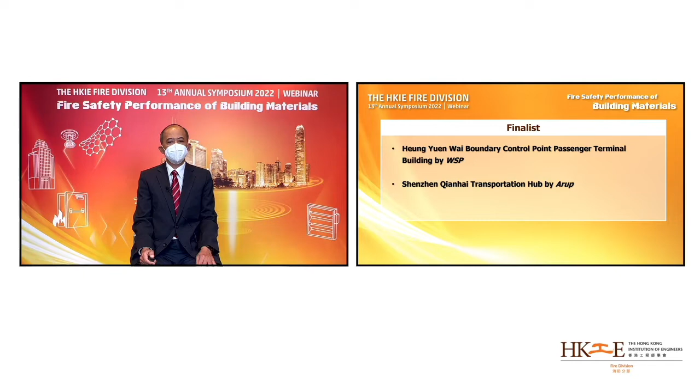This year, the submissions were all of excellent quality and represent a very high standard of works. After the judging panel's critical assessments, they decided 1 grand award, 2 commendation merit awards, and 2 finalists. Here come the results. The finalists are Heung Yuen Wai Boundary Control Point, Passenger Terminal Building by WSP, Shenzhen Qianhai Transportation Hub by Arup. The commendation merit awards are ASI by Arup, Eastern District Advanced Medical Center of Hong Kong Sanitarium and Hospital by Arup.

The grand award goes to the Hong Kong section of the Guangzhou, Shenzhen, Hong Kong Express Rail Link, Hong Kong West Kowloon Station by MTR Corporation and AECOM IDAS joint venture. Great congratulations again to all winners. In order to express their gratitude, our grand award winner has prepared a video to say a few words for us. Thank you.

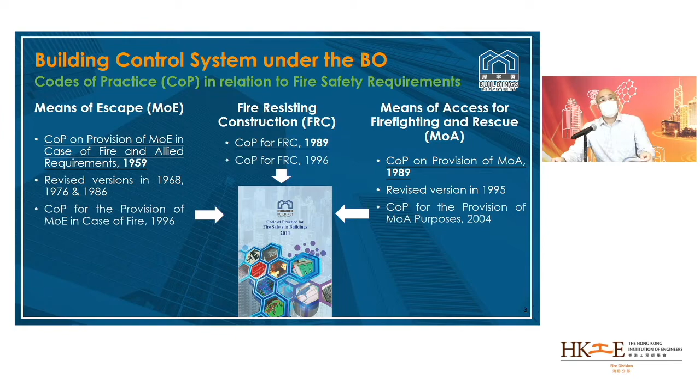Coming back to the statutory requirements. One of the main purposes of the BO is to provide for the planning, design, and construction of buildings. Any person who intends to carry out building works is required to appoint an authorized person, AP, a registered structural engineer, RSE, and where necessary, a registered geotechnical engineer, RGE, for the geotechnical elements, to prepare and submit plans for the approval of the Building Authority, BA. Before commencement of the approved works, consent from the BA is also required. The person is also required to appoint a registered contractor to carry out the building works. No new building shall be occupied unless the BA has issued the occupation permit.

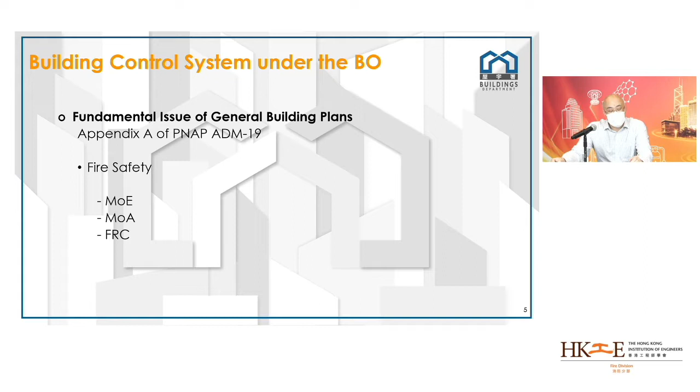Now, for submission of general building plans, superstructure plans, and drainage plans, etc., a curtailed check system has been adopted by BD for checking fundamental issues only. PNAP ADM-19 Appendix A has listed out all such fundamental issues for general building plans, including MOE, MOA, and FRC. MOE. The requirements of MOE are governed by Regulation 41 of the Building Planning Regulations. Paragraph 1 is most important, which says, every building shall be provided with such means of escape in case of emergency as may be required by the intended use of the building.

Now, MOA. As stipulated under Building Planning Regulations 41A, B, C, and D, MOA involves 4 parts: the access staircases for firemen, firemen's lifts, firefighting and rescue stairways, and emergency vehicle access, EVA. The first 3 regulations outline the requirements for MOA to allow firemen safe and unobstructed access to all floors of the building in the event of fire, while EVA concerns vehicular access and operation of fire engines.

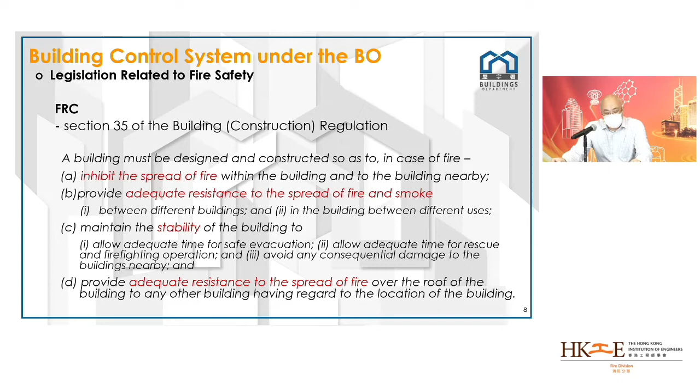FRC. The requirements of FRC are governed by Regulation 35 of the Building Construction Regulations, which stipulates that a building must be designed and constructed so as to, in case of fire, inhibit the spread of fire, provide adequate resistance to the spread of fire and smoke, maintain the stability of the building, and provide adequate resistance to the spread of fire over the roof of the building to any other building.

Now, the FS Code. The FS Code was issued by Building Department in September 2011 to provide guidance on compliance with the requirements of MOE, MOA, and FRC. In addition, it also provides guidelines on the testing standard for the fire properties of building elements and components, fire safety management of buildings, and an alternative approach in fire safety design, that is, fire engineering approach.

The FS Code comprises 7 parts. Part A shows the framework for fire safety in buildings, the objectives of fire safety and compliance. Parts B to D provide the deemed to comply provisions in relation to MOE, FRC, and MOA respectively. Part E provides the deemed to comply provisions for the fire properties of building elements and components.

Part F provides guidelines on managing and maintaining the fire safety provision of buildings to assure that the fire safety provision installed can be operated effectively for the intended life of the building. Part G provides guidelines on fire engineering.

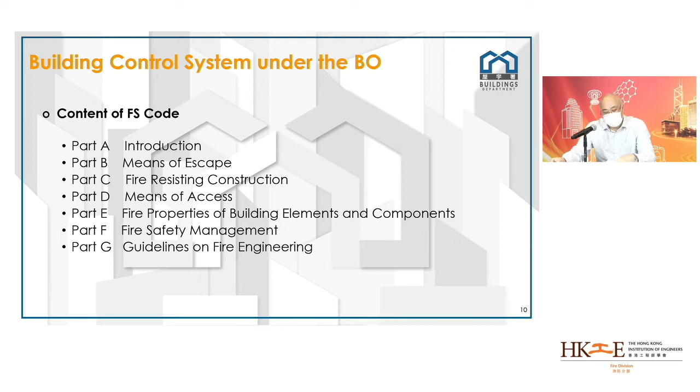Now we come to the principle on use of materials under FS Code. Part E of the FS Code stipulates the relevant parts of the international standard of ISO and the national standards which are considered acceptable to the BA for demonstrating the fire property of building elements and components.

As mentioned before, Section 35 of the Building Construction Regulation stipulates that a building must be designed and constructed to inhibit the spread of fire and provide adequate resistance to the spread of fire and smoke. Section 28 and 30 of the Building Construction Regulation also require that the material used for claddings and curtain walls shall be non-combustible.

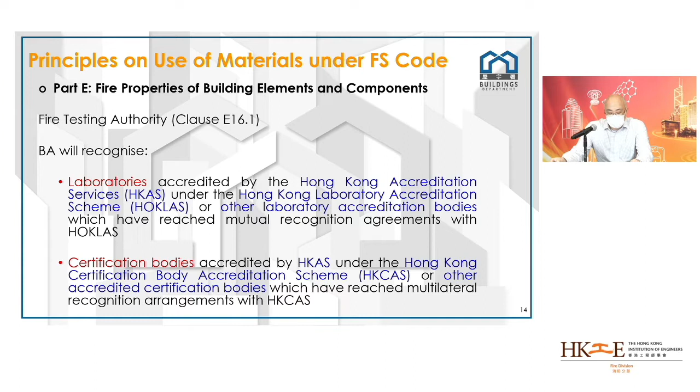As stated in clause E16.1 of the FS Code, the BA recognizes the laboratory accredited by the Hong Kong Accreditation Services, HKAS, under the Hong Kong Laboratory Accreditation Scheme, HOKLAS, or other accredited laboratories with mutual recognition agreements with HOKLAS. The BA also recognizes the certification bodies accredited by the HKAS under the Hong Kong Certification Body Accreditation Scheme, HKCAS, or other accredited certification bodies with multilateral recognition arrangements with HKCAS.

As stated in clause E16.2 of the FS Code, the fire properties of materials, products, or construction components shall be tested in accordance with or assessed against the standards stipulated in this part and certified as being capable of achieving such fire property to the satisfaction of the BA. The BA accepts test reports prepared by a recognized laboratory; the BA also accepts an assessment report prepared by a recognized laboratory or certification body.

Acceptance of test, assessment report, and certificates of conformity. Under the BO, AP, RSE, RGE, and RC have responsibilities to supervise building works, including the selection and application of building material products, and to certify compliance with the relevant provisions of BO upon completion of works. BA relies on AP, RSE, RGE, and those independent laboratories for testing for compliance with the standards and for certification.

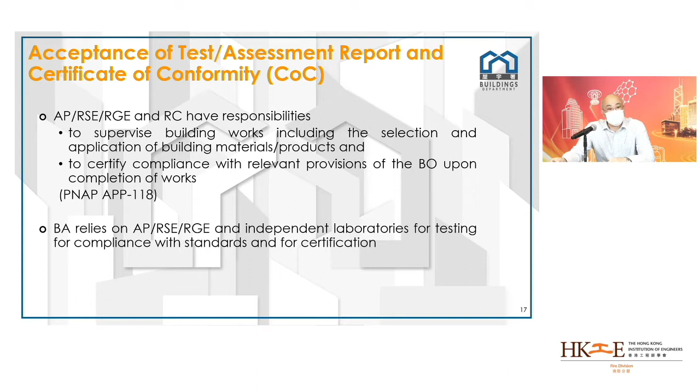PNAP APP 13 and Practice Note for Registered Contractor, PNRC 25, require submission of test and assessment reports and certificate of conformity together with the certificate and schedule of building materials and products by the AP and RC upon the application for OP or completion of works.

Now we come to product certification system. Product certification is a process in which a third-party certification body, after undertaking the specified procedures, issues a certificate of conformity, COC, also known as product certificate, to a supplier confirming that its product satisfies the requirements of a specified Product Conformity Certificate Scheme, PCCS. PCCS stipulates a set of requirements, rules, and procedures for specific product.

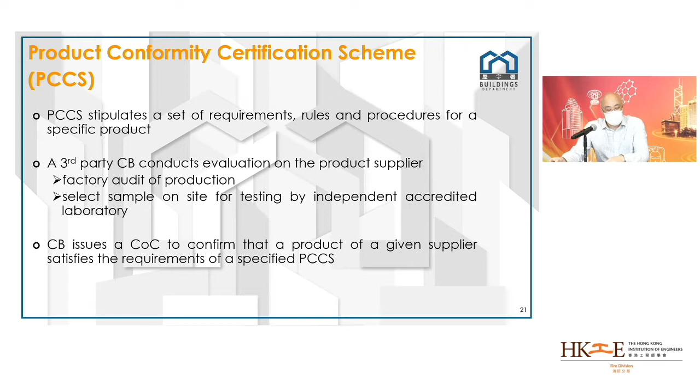A third-party certification body will conduct rigorous evaluation on the product supplier in accordance with the PCCS, for example, by means of factory audit of production or on-site selecting for testing of samples by an independent accredited laboratory, etc. A COC may then be issued to confirm that a product of a given supplier satisfies the requirements set out in the specified PCCS.

Product certification can enhance the product quality through upstream control and ensure the consistency in product quality through continuous surveillance of product process in the factory. Initial evaluation for certification of a manufacturer includes factory assessment of production and selection of sample for testing to ensure the continuous compliance with the conditions of certification. Periodic surveillance audit to the plant and compliance tests of randomly selected samples will be carried out.

Recertification audit will usually be conducted every 3 years before the expiry of the COC. Thus, product certification should bring benefits to the regulatory authorities as to enhancing building safety due to better quality control of building products.

As such, BD issued a new PNAP APP 165 and revised the PNAP APP 13 and PNAP ADM 20 in September 2021, promulgating the acceptance of COC of fire-rated door sets and non-load-bearing fire partition walls under PCCS for passive fire protection products, fire door and non-load-bearing fire partition, issued by accredited certification bodies, as an alternative to the test or assessment reports prepared by accredited laboratories to demonstrate compliance with the BO.

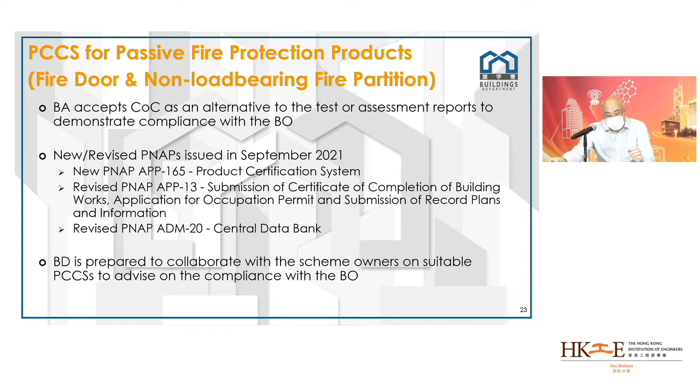Central Data Bank. Central Data Bank mainly contains information of building materials, components, and construction systems that have been accepted by BD. Such acceptance in Central Data Bank will generally be based on tests and assessments carried out by the accredited laboratories or the COC issued by relevant accredited certification body. The Central Data Bank aims to provide a reference to the AP, RSE, RGE and other parties concerned in the building industry. It is intended to help sharing of information among the administrators and to enhance public access to information.

The test assessment reports and COC should be assessed and certified by the AP, RSE, RGE appointed for a completed private development project as meeting the standards stipulated at the time of submission to BD in accordance with the PNAP APP 118 and APP 165, respectively.

If the AP, RSE, RGE are satisfied with the use of such materials and do not wish to submit a hard copy of the test assessment reports or the COC, which are identical to those listed in the BD list of the Central Data Bank, they may simply quote the reference numbers from the Central Data Bank in their certification. Central Data Bank can be found in BD's website.

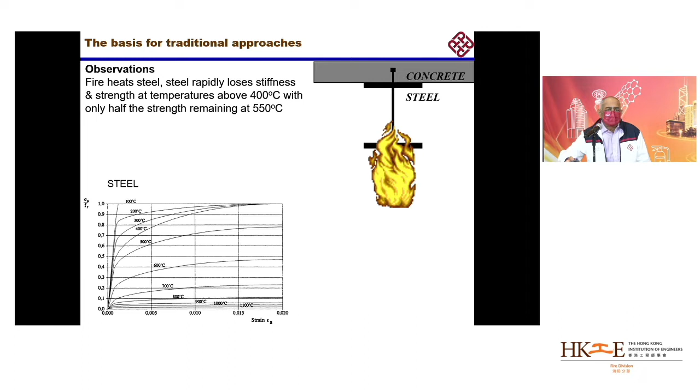But in the case of concrete, because concrete has much lower thermal conductivity compared to steel, concrete actually doesn't lose so much of its sectional strength and stiffness, because most of the heat is limited to the surface layers. So that's typically the general understanding of material behavior in fire.

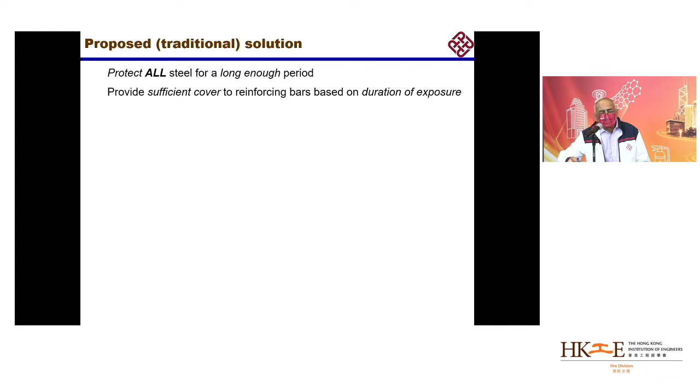Based on that understanding, the traditional proposed solution is to protect all steel for a long enough period because of its properties, but provide sufficient cover to reinforcing bars, because concrete is typically not just concrete, you have steel inside it, reinforcing bars. So we provide cover to reinforcing bars for a sufficient depth so that they are protected from the heat effects.

And then we traditionally apply a standard fire curve, which is a 100-year-old curve that was developed in the USA. There are many versions, like the British Standards version and others. We then decide on the basis of this how long we are going to protect the structural member. So this is the traditional approach, the prescriptive fire protection approach.

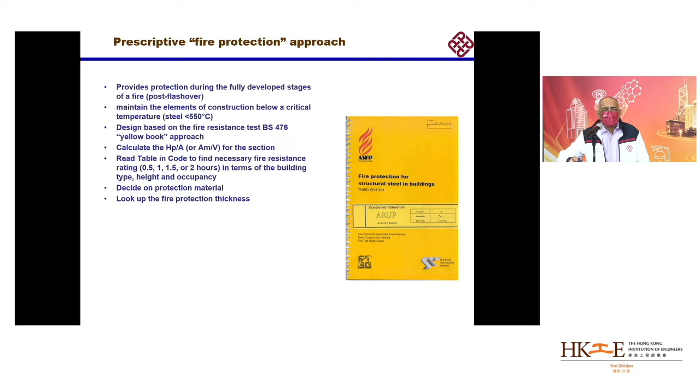So the left beam will typically heat much faster in a fire, and the right beam will heat slower because of larger volume and lower surface area, because the heat has to enter through the surface. So typically you can adjust the protection based on this section factor, the surface area over volume ratio.

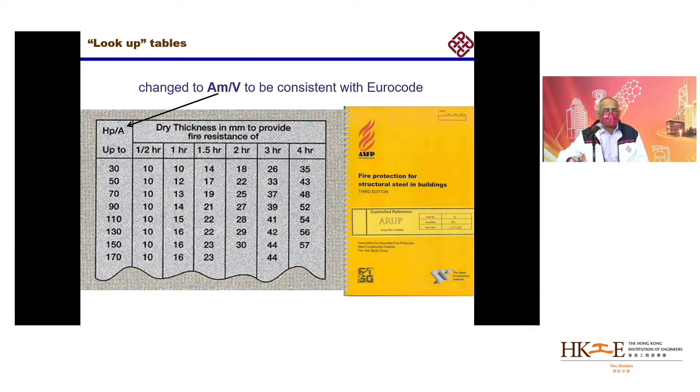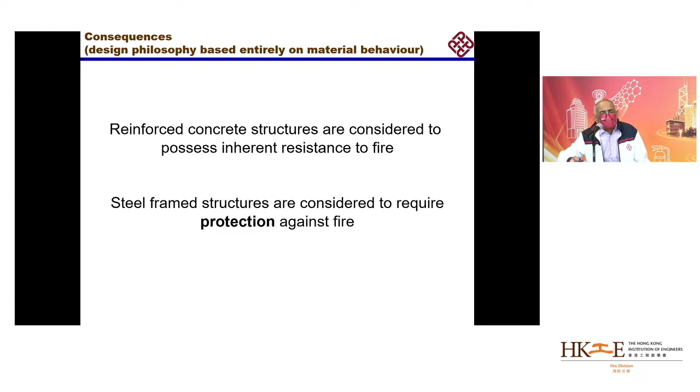So this is basically what generally happens, and it's been happening this way for a long time. The consequence of this way of thinking about fire safety and fire resistance of materials and structures is that reinforced concrete structures are considered to possess inherent resistance to fire, while steel frame structures are considered to require protection against fire. So this is what people think.

And of course the steel industry doesn't like it so much because the fire protection part adds significant cost, and the cost of fire protection can be 10% to 30% of the cost of the structure, based on height, usage, etc.

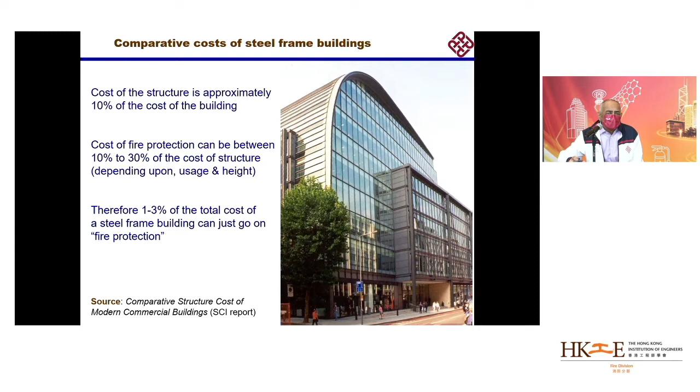Okay, so there have been major events like the Broadgate fire, June 1990 in the UK, where the steel members were not protected because the building was still under construction, and the fire lasted for 4.5 hours with high temperatures. But the building did not suffer too much, despite the steel members not being protected.

The total losses were around £25 million, but the structural repair cost was only 2 million, and the repairs were completed in 30 days. So it shows that reality may be different from our expectations in terms of material behavior.

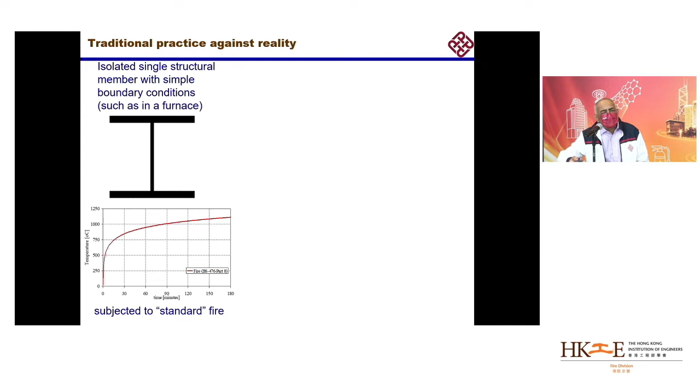So I'll tell you why maybe this is the situation, because what we assume is isolated structural members. When we look at the behavior of steel beams, etc., we look at isolated structural members in a furnace, because we base it entirely on the material behavior. But the reality is that the structure is like a composite beam, and it behaves in an integrated manner, and the structural response depends upon a much more complex situation, and the real fire also is not a standard fire.

This is a typical compartment fire curve, a kind of representation of a compartment fire. You can have ventilation controlled or fuel controlled fires. If you have a fully developed fire, then this is a famous graph which shows that the ventilation controlled fire typically can be a little bit more severe than the fuel controlled one.

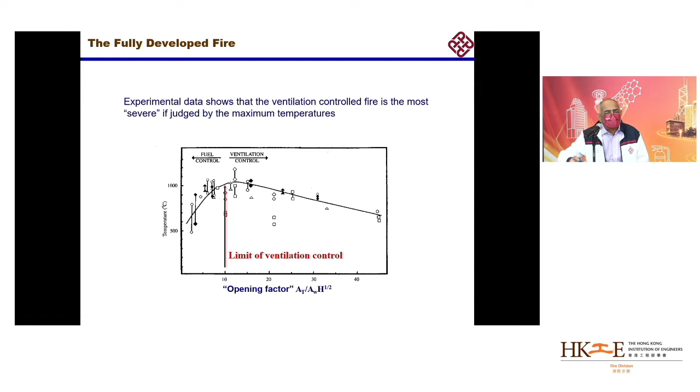So basically what we say is that if you have natural fires, unlike the standard fire, you can have different fires based on the ventilation conditions and the fuel load, and you can have fires which are hot and short-lived, and fires which are relatively cooler and longer lived. Quite different from the standard fire. So in that case, the time aspect of the standard fire doesn't make much sense.

So if we then apply these different fires to basic structural mechanics, this is an example of a restrained beam. This restrained beam is a good representation of a realistic structure, because structural beams are not isolated, they are connected to other parts of the structure. So you can assume that these boundaries are springs.

And then when you heat this beam, and assume that this is a composite beam with steel and concrete, as I've mentioned, the temperature distribution along the height is as shown on the left-hand side graph: the concrete at the top is going to be very cool, concrete exposed to fire is going to be hotter, and the steel is going to be the hottest. So that's the temperature distribution.

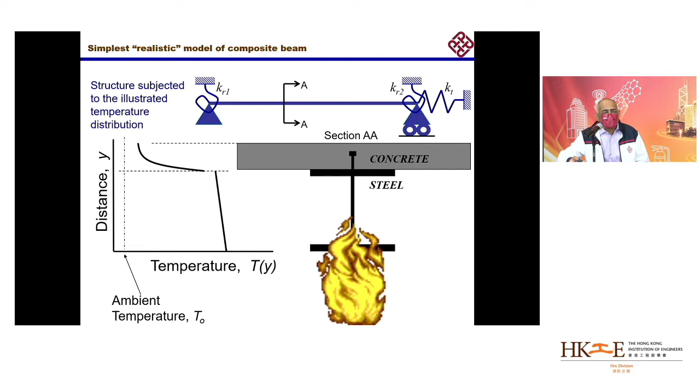This temperature distribution is so complicated, so we say that it is equivalent to some uniform temperature increase delta T and some thermal gradient T,y. We can decompose that, right? We can do some decomposition, and then apply each separately to understand what it does to a beam.

So let's start with a simple beam. This is a simply supported beam; you can see the right support has rollers in it. So if you heat the beam with a temperature delta T, what you'd expect is it will just expand. Whether it's made out of concrete or steel doesn't matter, both expand in fire. So it just moves a little bit towards the right, and we can calculate that. It's very easy to calculate if you know the thermal expansion coefficient of the material.

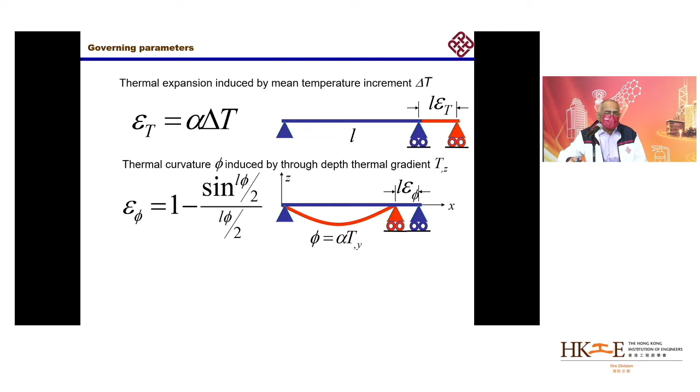Okay, now if you remember, it was not just the uniform temperature increase delta T that we are talking about, we're also talking about the thermal gradient. So if we apply a thermal gradient to the beam, no mean temperature, just a thermal gradient, then the reverse happens. You see the roller moves to the left this time. Because there's no expansion, it just curls because of the thermal gradient now. And we can also calculate that.

But obviously these things don't happen separately, they happen together. So what may happen is that one moves right, one moves left, so you can see that those are cancelling motions. So you may actually have significant deflection, but not much stress in the beam. The fire just curls the beam. But when firefighters or engineers who are not trained look at the high deflections, they think that it's because it's weak and there's too much loading. But it's just the thermal deformations.

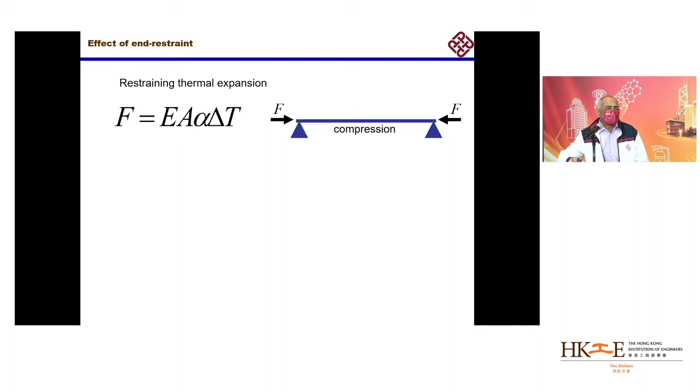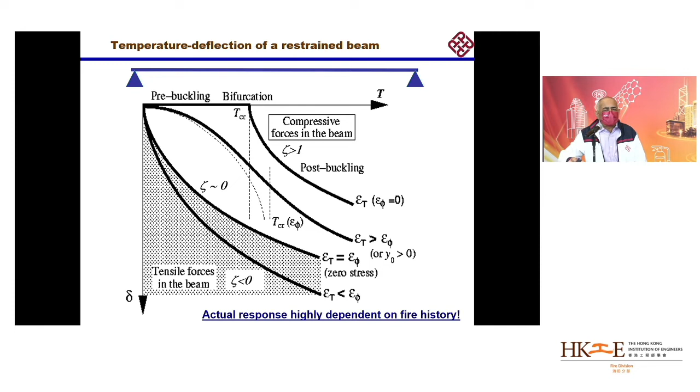So we can take a little model of this 9-meter length beam and apply a uniform temperature delta T of 400 to all cases and look at 5 cases of applying different gradients. First is 0 gradient, then increasing up to 10: 1, 3, 5, 10. And this is the deflections you get. The top one, you see no deflection because there's no gradient.

So the beam just keeps having compression forces, and at some point it buckles. If you take a stick and you keep pressing it vertically, at some point it will just get out of the way. It will buckle. So that's a buckling deflection. The other ones are gradient based, and those are larger deflections.

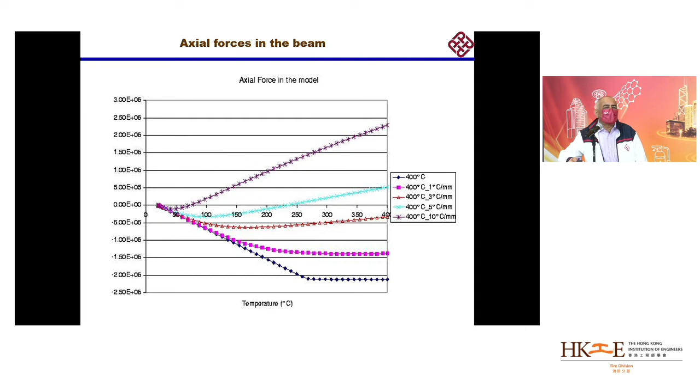And this is the axial force. The bottom one now is the 0 gradient, where you see it goes up to a value, and when it comes to the buckling load, it stays constant. The top one is the highest gradient. The bottom ones are all compression forces. The top one goes into tension because the ends are restrained.

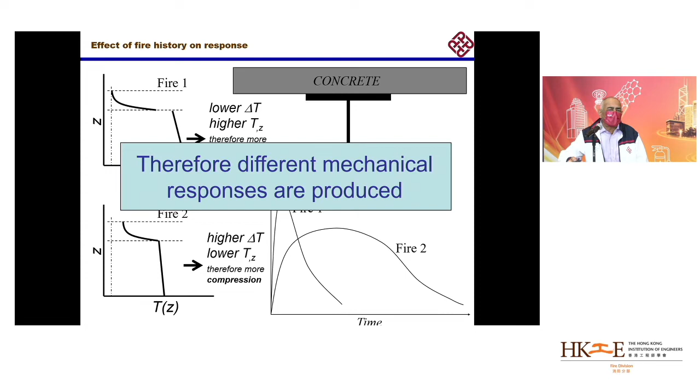So when you apply realistic fires, you can have very different behaviors of this beam, and different failure mechanics and different mechanical responses are produced. We can make some solutions like this; I won't go into that. And this is then seen in real structures.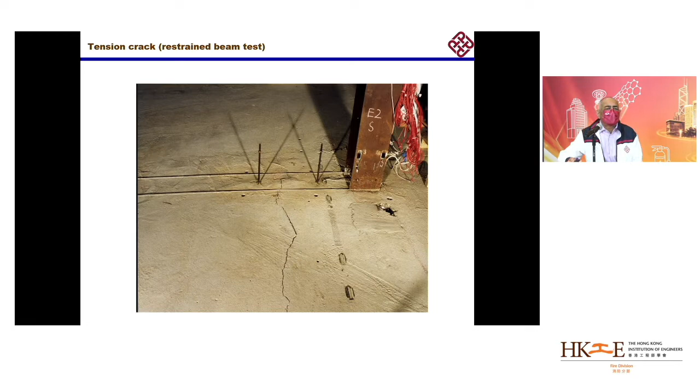But what you see is at very low temperature, the beam bottom flange is buckling, because the rotation restraint is too high, and the top of the slab is also cracked. So you get a bottom flange buckle because it's trying to bend but it's not able to, so it's cracking at the top and buckling at the bottom. And when it cools down, it becomes shorter because there are plastic strains in it, so it pulls off the connections.

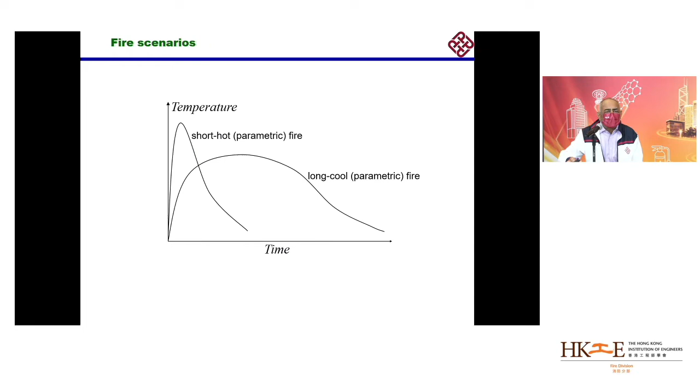So these are the basic mechanics we learned, and we applied them to an Arup project where we did the analysis of these areas and applied a short hot fire and a long cool fire, and these are the two areas that we modeled. These panels are interesting. Let me see if I can get the video going.

Is the video? Yeah, it goes. Yeah.

See, so if you apply the fire to this part of that building, you can see the column being pulled by the sagging slab, which looks dangerous. So what we decided was that the protection should be applied to all the beams that are connected to columns, and then if you look at the deflection, you get a much better behavior, and the column is not pulled anymore.

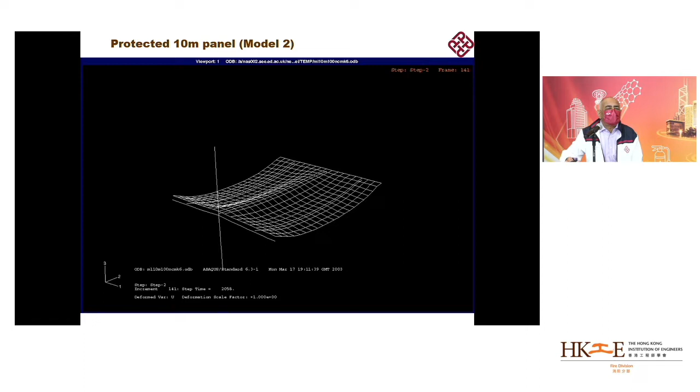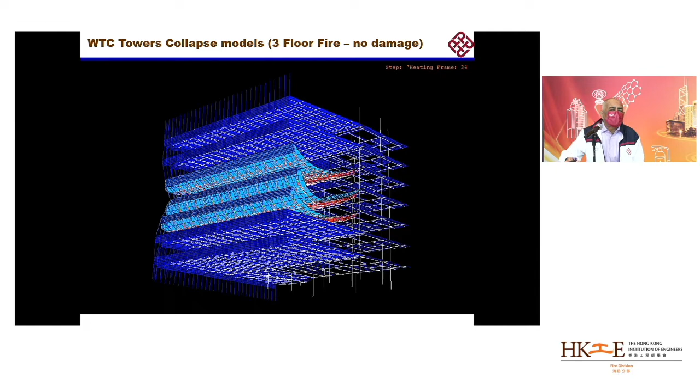Then the World Trade Center collapse happened, and we started modeling that. And this is showing us the similar behavior that we saw in the consulting project: the Twin Towers could have collapsed in this way, that the fire sags the floors and the floors pull the columns in. You can see this here even more clearly.

You see? Yeah, that basically is what we feel is the mechanism of tall building collapse, which is completely ignored in design, because we are so material focused. So in a sense, I'm talking about materials, but I'm saying that materials and structures are both important, and material behavior is obviously important, but we should also look at the structural behavior.

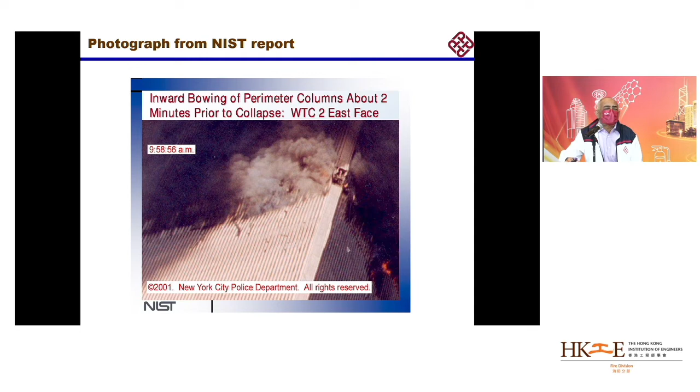And so we look at the pictures, and you can see some pictures which are showing those kind of inner sags, yeah, inward bowing. This is not my saying. It's the NIST report, which is saying the inward bowing of perimeter columns 2 minutes before collapse. So you see that. So I'll skip that because I'm running a bit late.

This is the case of finite restraint, not infinite restraint, where you see the column on the left-hand side, and here again we apply different gradients, 0 to 10 degrees C per millimeter, and we use different stiffnesses of the column, 1, 4, 10. So the 4 figures are different stiffnesses. The first one is the same flexural stiffness as the beam. The last one is 100 times, which is almost fully restrained, and 4 and 10 are more realistic.

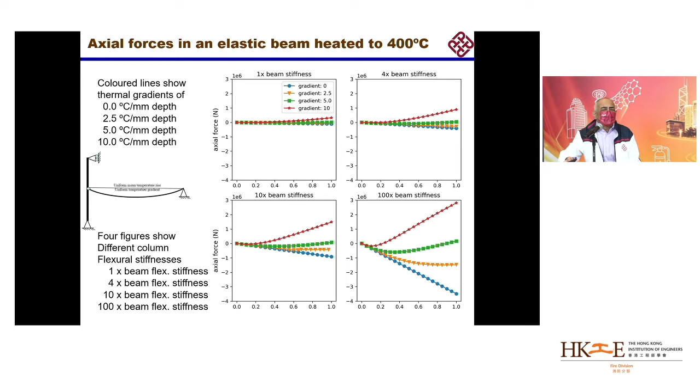So you see that you still get your tension forces and compression forces depending on different gradients. Okay, so you get different behaviors. Again, this is deflections for the same case.

Now, if we want to see whether those situations happen in real beams, this is some analysis we did where we looked at 60 universal beam sections, applied 1 hour standard fire exposure, and looked at the actual gradients that happen. And you can see that we used from 0 to 10, so you see the whole 0 to 10 range appearing. The bottom axis is section factor. If it's high, that means the perimeter is large and volume is low, so more like thin.

Modern buildings typically are long span. In long span, they have deep beams, cellular beams, etc., and relatively thin slabs. So they correspond to this high section factor situation. So there you get very large gradients. That's what basically this is showing.

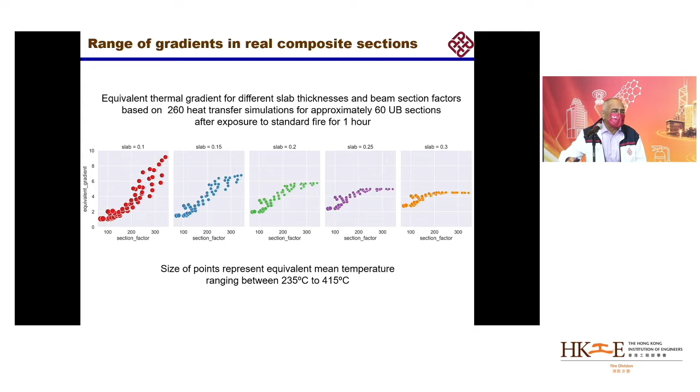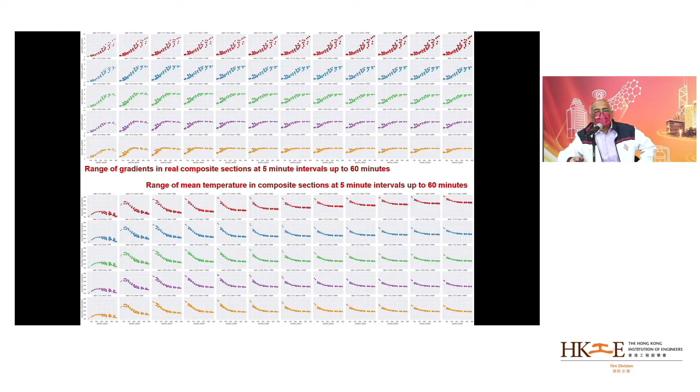So the first one is after 5 minutes, and the last one is about 60 minutes. So that's the whole range of time, the gradient and mean temperature distribution. In the top row of the bottom figure, you can see the mean temperature increasing over time. So you can see those effects. Basically, it's saying that the gradient is still quite high for

high section factors. These figures we have recently produced, so we are still analyzing them, but they give us an understanding of the real situation, because the key parameters that I've discussed today that influence structural response are the mean temperature in a structural section and the thermal gradient. And these are just a more detailed examination of those. So I think that's probably all I have to say.

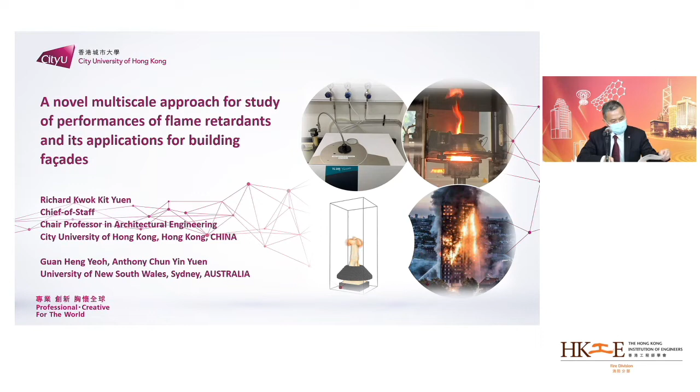Now, to start with, I would like to give you a very quick background of what we are proposing. As we all know, the devastating nature of fire creates disasters that result in a great loss of both life and assets. From post-fire investigation reports, it is notable that these fires were caused by extensive use of composite material in building products, as highlighted by severe fire incidents such as the Grenfell Tower fire in the UK.

Nowadays, because of rapid change in building and developments in architectural technology, this has led to more complex structures which use stronger and more lightweight components. Composite materials are known to be a good candidate because of their lightweight and cost effectiveness, as well as their flexibility in manufacturing. However, a major disadvantage of these composite materials is their poor fire performance.

When they are exposed to a high temperature, these composites break down to release volatile combustibles. When they react with oxygen, they generate heat, namely the fire, as well as a number of gases including carbon monoxide, hydrochloric acid, and also hydrogen cyanide, which are toxic and responsible for the death and injuries in most building fires.

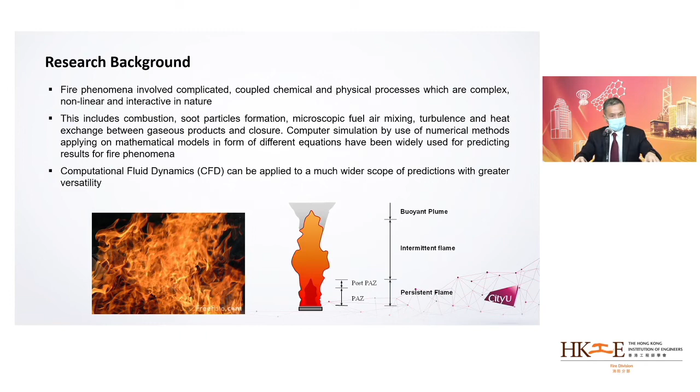Now, the computational approach can be adopted for fire retardant material behaviors, particularly to address the reduction of combustibility of external claddings by providing fundamental understanding of the burning characteristics of those materials. And in order to have an effective CFD prediction, we need to understand the fire for its key issues, which is important especially for fire retardant polymers.

While full-scale fire experiments may be conducted to replicate the actual fire scenario for the assessment of fire behavior and performance, they are very costly, complicated, and produce large amounts of pollutants. Modeling can become an alternative. Development of a robust numerical model to address the needs of fire safety assessment of fire-resistant polymers will be highly beneficial to the current fire safety community.

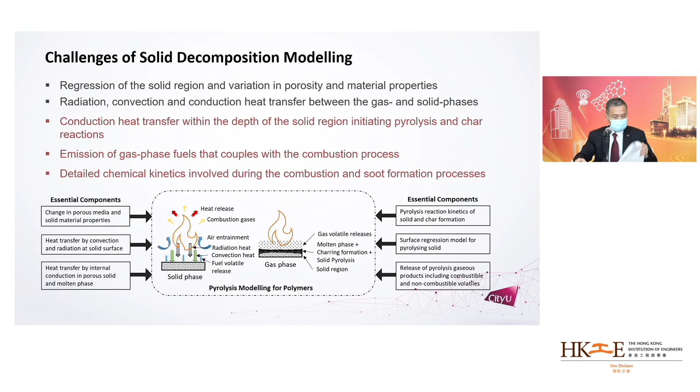In the traditional way of characterizing material flammability, we employ very conventional bench-type tests such as thermogravimetric analysis, which we call TGA, and/or cone calorimetry. They are very useful in characterization of material flammability and properties.

Now, in this talk, while I propose a multi-scale approach, I will stay with the conventional bench-type TGA experiment rather than what was covered by Professor Guan Heng Yeoh this morning, using molecular dynamics as a more advanced tool to satisfy this multi-scale approach. So I will restrict myself to experimental discussions.

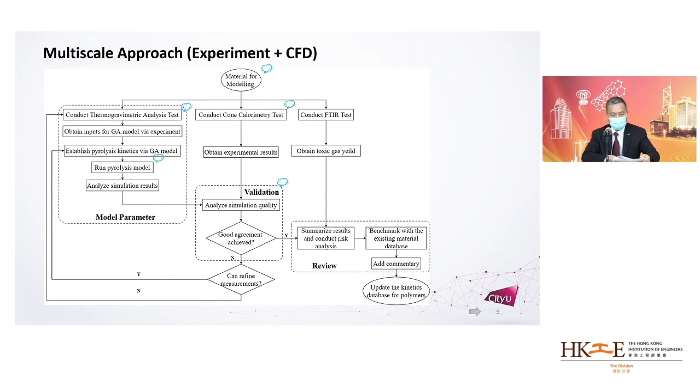After finishing all experimental tests, finalized kinetics can be used to run the pyrolysis model numerically or the CFD for the predictions. And at the end of this talk, I will also compare those calculations with the experimental observations to make sure that they are valid.

Now, first of all, let me go through a method of pyrolysis kinetic characterization. This is based on the mathematical expression called the Arrhenius expression, where the reaction rate dx/dt is given by 2 terms. The first term is a temperature-dependent term, and the second one is a conversion-dependent term.

And if you look at the temperature-dependent term, the Arrhenius expression gives k(T) equal to the pre-exponential factor A times the exponent of minus activation energy E over R, which is the gas constant, times absolute temperature T.

And with this expression, we can go one step further to take a log of this expression, which will result in a linear relationship between the left-hand side and the right-hand side parameters. This approach was first proposed by Kissinger, Akahira, and Sunose. We call it the KAS approach. This is a very conventional approach that will help us to generate or identify the pyrolysis kinetics for various components of a composite material.

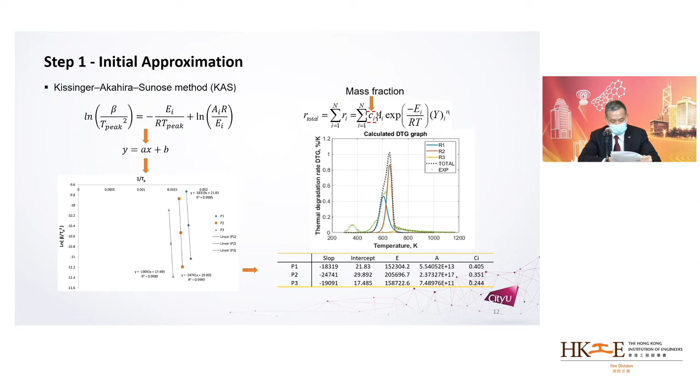With the KAS model, each of these peaks can be used to identify a set of A and E values, that is the pre-exponential factor and the activation energy, as a couple for each of them. And then, in order to optimize and get the best fitted values for A and E, a genetic algorithm will be applied to do parameterization or optimization.

Using this GA approach, we can optimize the pyrolysis kinetics from the KAS method. And then finally, we can use the optimized parameters to mimic the pyrolysis kinetic result which we obtain from the TGA analysis for various heating rates, such as 5 K per minute, or 10, or 20 degrees.

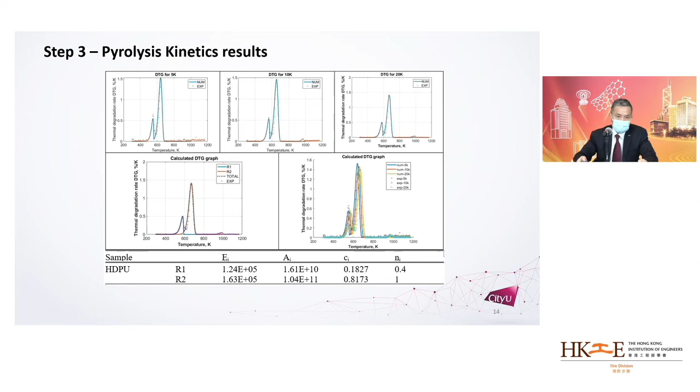And therefore, the pyrolysis kinetics we obtain are very effective and useful data for further analysis of the pyrolysis of those composite materials when different fire scenarios occur. So we can apply this to a number of materials by just repeating the whole process.

A cone calorimeter consists of a radiation heater where the sample is placed on the sample holder, and the dimension is standardized so that when we excite the material by the radiation heater, the material can be ignited by a spark, and there we can measure the heat release rate as well as the gas emissions from the burning material.

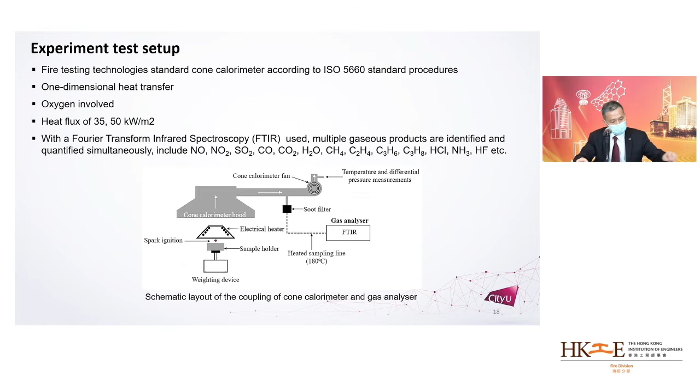Now, the result of these cone calorimeter tests can be divided into a number of observations. For example, we can obtain gas emissions like carbon monoxide, HCN, etc. And then for different materials, we can do the same test and obtain those values one by one.

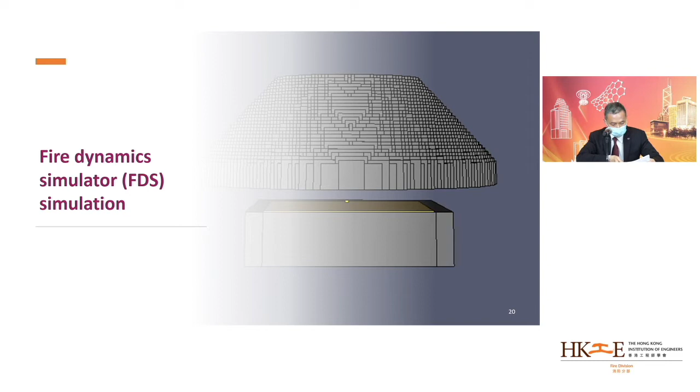And in order to demonstrate the multi-scale approach, we also propose CFD calculation using numerical modeling, repeating the cone calorimeter experiment. Without going into details, I would like to show you some of the results that we obtained for the low-density polyurethane foam. On the right-hand side, this is a numerical result with the animation of the flame that is being generated and predicted by the CFD calculation.

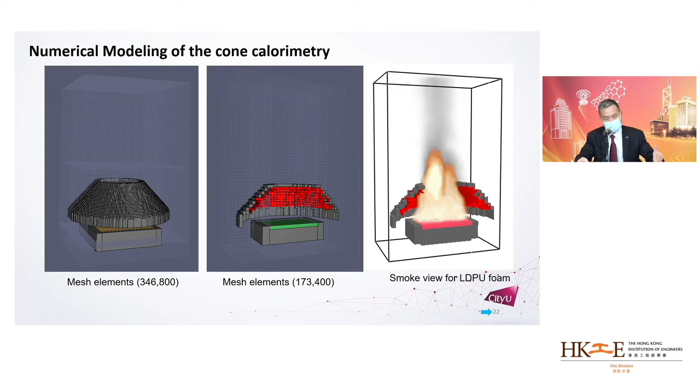Now, in this calculation, we use FDS, which is a well-known software developed by NIST for fire calculation. The only thing that we make use of from the previous discussion is the chemical kinetics, the pyrolysis kinetics that we obtain from the KAS analysis based on the TGA experimental result. So from the TGA, which is a bench scale experiment involving a very small sample, we then extend it to a larger scale sample, such as, in this case, the 10 centimeter times 10 centimeter composite material being tested under a cone calorimeter.

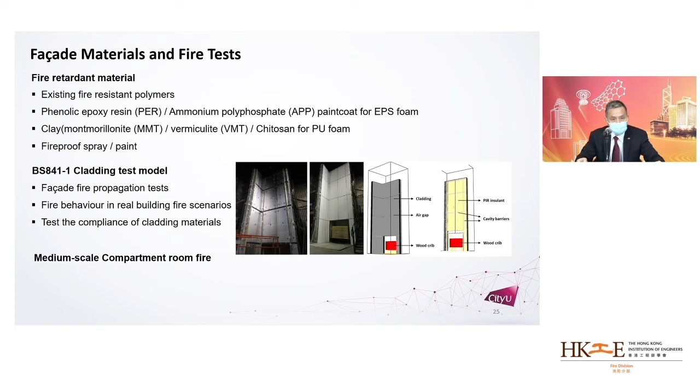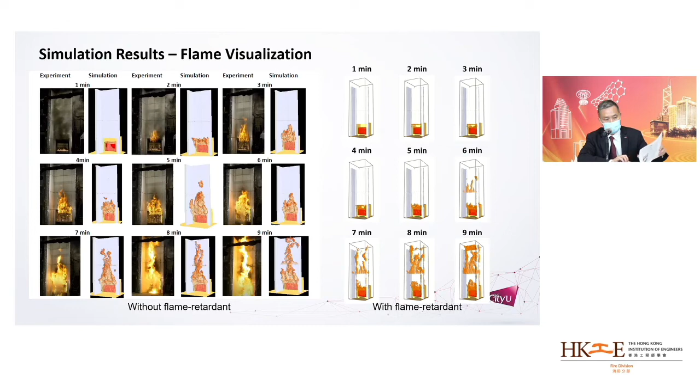So effectively we can capture the characteristic of flame retardant using kinetics that we obtain from a separate bench type experiment, and then input and inform our CFD calculation to do a very effective calculation, even for flame retardant materials. So our preliminary observations confirm that this multi-scale approach can help us to perform holistic analysis of flame retardant material or material without flame retardant for bench type fire tests as well as full-scale tests.

And because of the time limitation, am I running out of time? Is it? It's okay, I think. It's okay. Yeah. Okay, so I can flip through a number of slides.

Now, potentially, we have the opportunity to study more full-scale fire, like building facade fire. And as you can see, over the years we have had a number of disastrous fires over buildings due to facade material combustion. And it is very promising if we rely on this multi-scale approach. Firstly, obtain the right kinetics of the composite material. Secondly, we apply the kinetics to the pyrolysis model.

And finally, we can combine this pyrolysis model with the CFD calculation to predict or to investigate fire scenarios involving full-scale building facade fires, as well as the prediction of performance of building facades if we have some new material being invented.

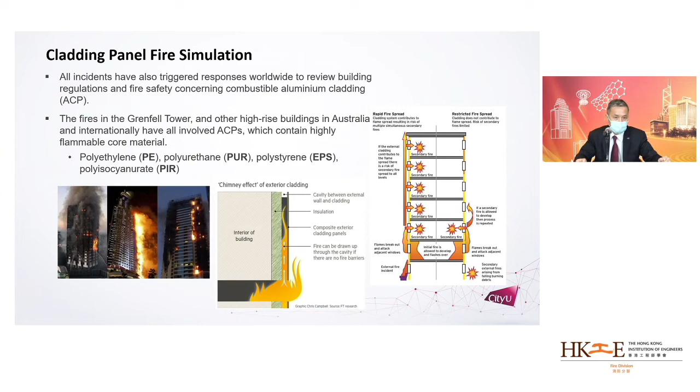And finally, I would like to give you some of the potential predictions that we can obtain. Of course, I have not got this result yet because, even computationally, this is very costly. Not to mention that it is impossible to do fire tests at such a scale because it would be very disastrous. And these are some of the possible simulation results over a facade with composite materials.

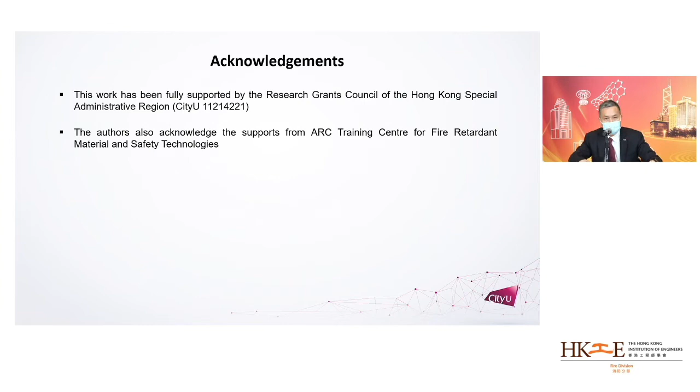I would like to thank Professor Richard Yuen for his presentation, which shared with us the latest frontier technology related to the application of multi-scale approach for the studying of performance of fire retardants.

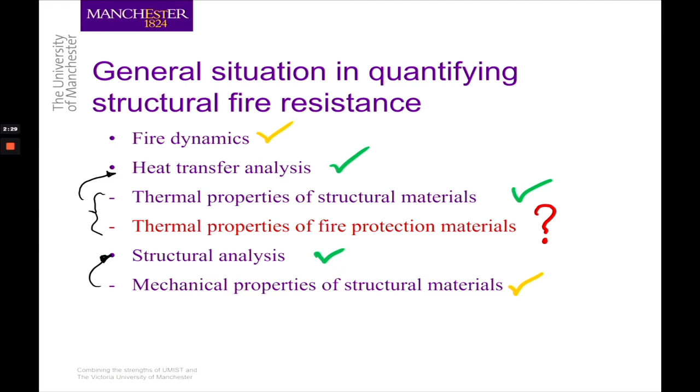In terms of structure analysis, again, the methods are quite difficult, take time to do, but the methodology is quite mature as well. And of course, then we need mechanical properties of structural materials for doing structure analysis. Again, there is good enough information. So it is then thermal properties which are troublesome. Let's then look at the situation we have so far.

In terms of thermal properties, you may have come across such information which gives you so-called generic information of thermal properties of various materials. Thermal properties being density, thermal conductivity, specific heat, and in some cases maybe some moisture of materials. So what we have in here is so-called ambient temperature properties. The manufacturers might provide you with such information because they need to have the information to allow you to, for example, carry out energy consumption at ambient temperature.

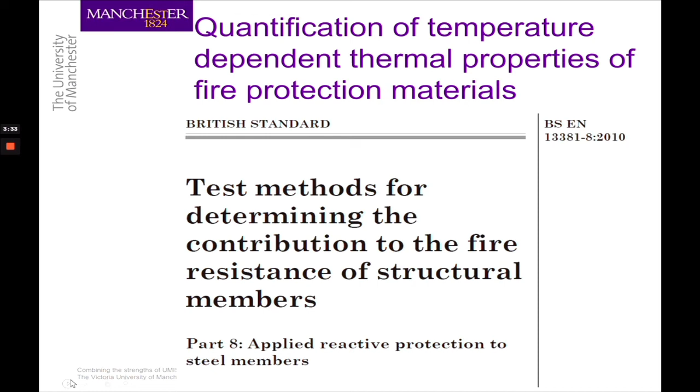At elevated temperatures, it might be possible to follow this standard in here to quantify the temperature-dependent thermal properties of fire protection materials to structural members. And many of you might be already familiar with the Eurocode 3 equation for calculating the temperature of protected steel. This method of calculating the temperature-dependent thermal properties of fire protection materials is no more than an inverse method of analysis for material properties.

It is really the inverse solution: given you know the temperature of the fire as well as the temperature of the steel from a fire test, you then work in the reverse direction to work out the thermal property of the fire protection material. So this then is the method which is in the Eurocode for calculating the temperature of protected steel, and this is then the inverse calculation method.

But of course, this method is quite difficult. There's a lot of problems. For example, it requires a lot of expensive, large-scale fire testing, so it is very expensive and time-consuming. It is also not good enough because it lacks general applicability, because this method has no understanding of the fundamental sciences which affect thermal properties of materials. And it can't really distinguish between different effects which might affect thermal properties of materials.

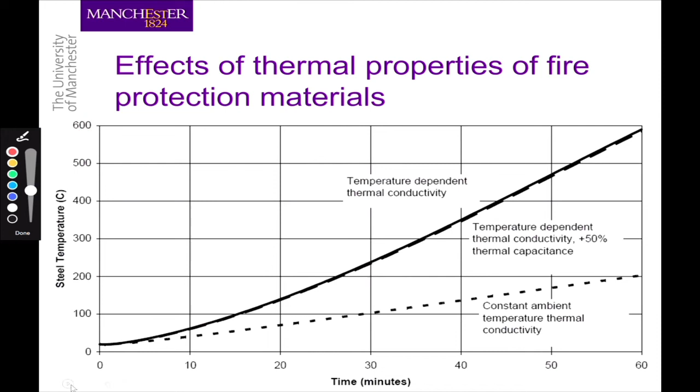What I have done here is I've used the temperature calculation equation in the Eurocode for protected steel. One, assuming that the material thermal properties are constant at ambient temperature. And the other one, I change the thermal properties of the material, especially the thermal conductivity, as a function of temperature. So you can see here, this piece of steel has a totally different temperature-time response. Without changing thermal properties to be temperature dependent, after 60 minutes I get about 200 degrees. But if I include temperature dependent thermal conductivity of the material, I get 600 degrees. Totally different results. But we don't really need such a big difference to cause big problems in our calculations.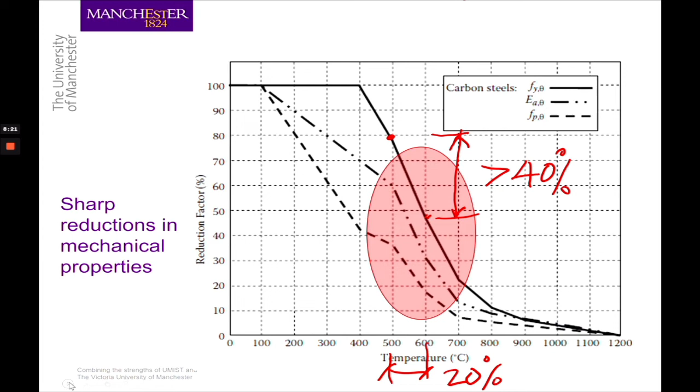So as structural engineers, we struggle to get things within 10 or 20%, but if you make a small mistake in temperatures, then whatever we do to improve the accuracy of our structural calculations may be just in vain, because we can't really achieve that. So it really is important to have much better control of accuracy of calculating the temperatures of steel. And that, of course, depends on the thermal conductivity or thermal properties of the material.

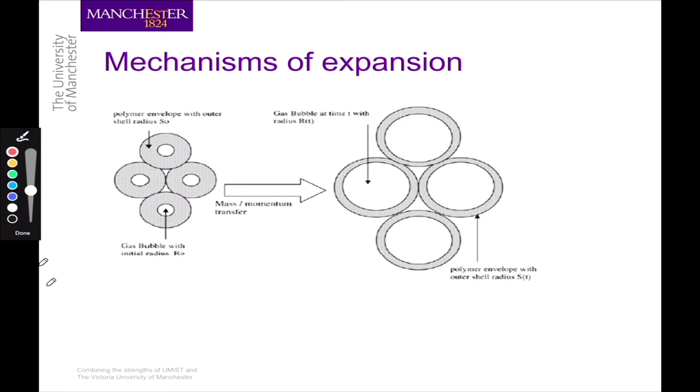How does expansion occur? Well, if you've got a substance which has some gas inside, and the pressure of the gas is increased, then of course it expands to a certain size. That is really the mechanism. Many years ago, a very clever scientist did some research and derived an analytical solution for how much expansion changes as a function of time, as a function of the pressure of the gas, as well as the surface tension of the bubbles inside. So we adopted this theory in our calculations.

Of course, to do that, we need to calculate the pressure, but pressure simply comes from the decomposition of solid intumescent coating into gas, because solid intumescent coating is about 1,000 times denser than gas. So with that, we can calculate the pressure. And it is possible to measure the surface tension and the viscosity of the material. So that is what we've done, and we have implemented this in our research.

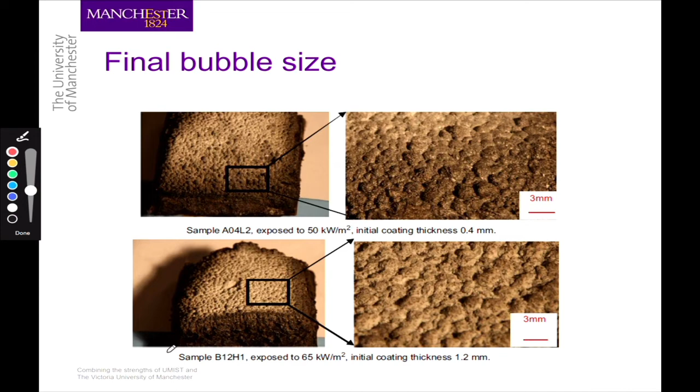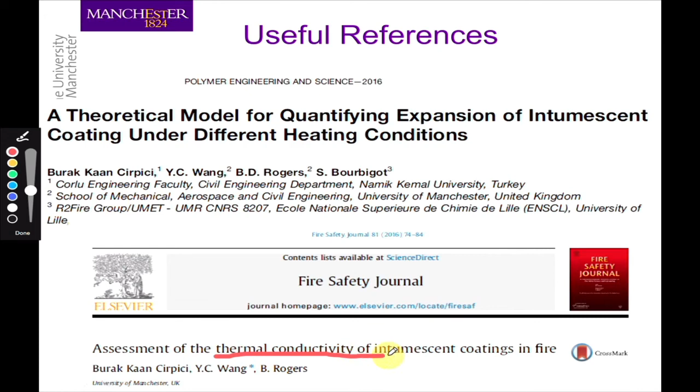If you're interested, we have published a couple of papers. One is about the expansion process, and one is about converting from expansion to thermal conductivity of intumescent coatings. Another piece of research which we've done on intumescent coatings is to look at the variabilities. As I said, we have adopted a theoretical solution for an idealized situation. Of course, real life is not idealized, so there are variabilities.

There's also another source of variability, that is the thickness of intumescent coatings, the so-called dry film thickness. So if, for example, we say the dry film thickness is 0.4 millimeters, in fact that can be a range of values that you would get in real life, as with other coating thicknesses. So putting things together, we have carried out probabilistic modeling of structural behavior with these variabilities, and derived a number of safety factors, depending on the failure probability. Again, you can find our results in this paper.

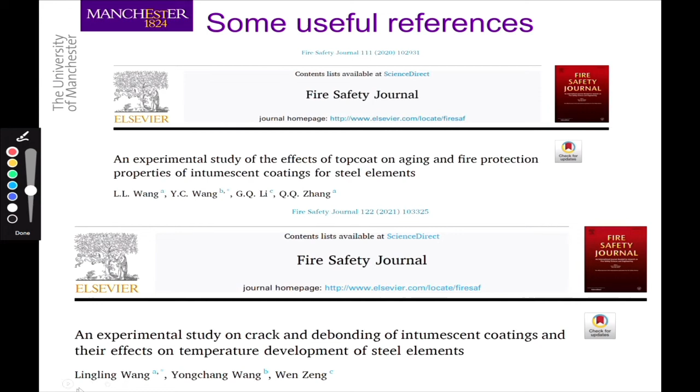Again, if you're interested, we have publications to help you understand some of the problems in here, as well as, of course, hopefully then our research results. So that's then the first aspect, material.

The other material then is gypsum. Gypsum, of course, is now widely used, certainly in the UK, maybe not so much in Hong Kong, where you use concrete everywhere. But in the UK, it's widely used as in partition, as in even load-bearing walls. So gypsum is everywhere as lining materials of your building. So they're everywhere. What are the problems with gypsum?

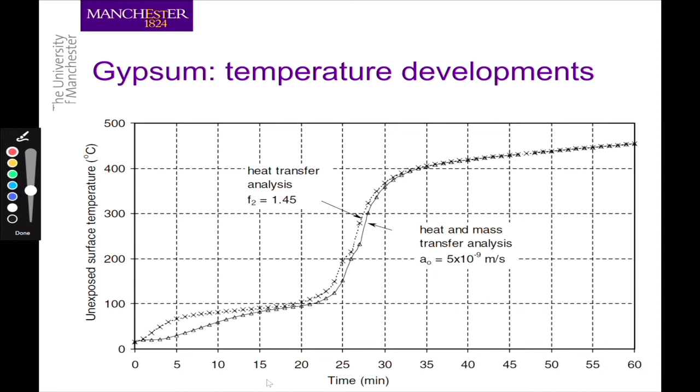One is this stage, where the temperature barely increases beyond 100. 100, of course, is the water evaporation temperature. And afterwards, there's this stage of rapid increase because, of course, of the highly conductive performance of the material. So then we have to look into these aspects.

What we normally do is to convert this process into some sort of equivalent additional specific heat in the material. But of course, this additional heat depends on how water moves around. So really, we have to carry out combined mass, which is water movement, and heat transfer, which we did, and then we found out how to increase this value depending on different fire conditions.

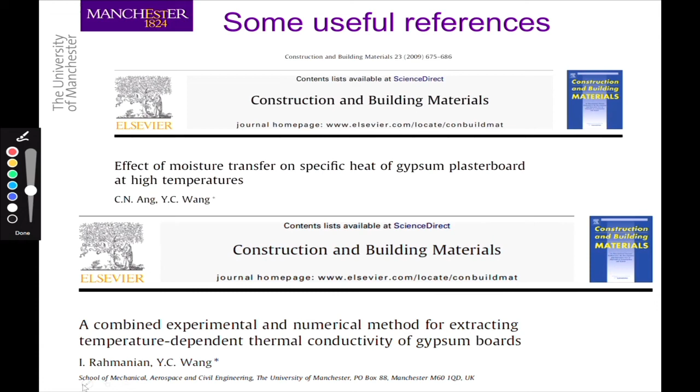Finally, about other fire protection materials, it is really difficult to find a lot of detailed research on these materials. For example, mineral wool. But a few years ago, I searched the internet and a lot of literature as well, and came up with quite a good set of results for various materials. And I did the systematic research, and I found that it is possible to provide a number of temperature-dependent models for thermal conductivity of the various materials.

It is thermal conductivity which is most important, because these materials are lightweight and their specific heat values don't affect results that much. So as you can see in here, the temperature dependency is temperature to the cube. This is because radiation inside is temperature to the power 4. So if you talk about the rate of radiation, which is equivalent thermal conductivity, then it's temperature to the power 3. Radiation becomes important because these materials have a lot of voids inside.

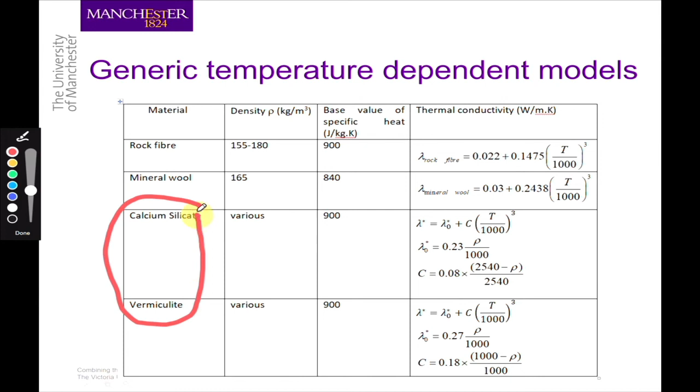In many cases, the materials have their fixed densities, but in some materials, depending on how much air you have, the density is different. Of course, depending on the density, which relates to the amount of bubbles you have, the thermal conductivity is also a function of density. This is how I related them. And remarkably, by this relatively simple reasoning, I was able to find these relationships which fit remarkably well with the data which I found from the internet.

And again, if you want more detailed information, you can consult this book which I published with my colleagues about 10 years ago. So we have made a lot of progress on thermal properties of the most common types of fire protection materials. But as I said, there are still challenges which need further research. So what are the challenges?

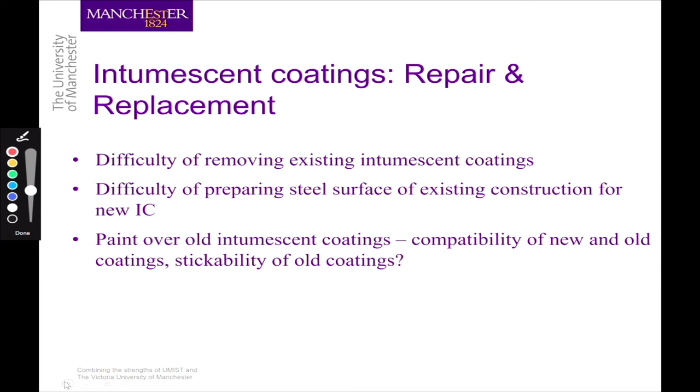So one possibility is to apply a new intumescent coating over an old intumescent coating. Well, then the difficulty is how compatible are they? Can they stick together? Of course, you may say, okay, I'm not going to use intumescent coating again, I'm just going to use board. Of course, you can do that. But if you want to use new intumescent coating for replacement, there are all sorts of issues to deal with. So that's something which really hasn't been researched.

On gypsum, there is the problem of cracking, which can happen. When cracking happens, this could lead, in the end, to the whole gypsum falling down. Really, these are very, very tricky problems to understand. At the moment, it's very difficult. We tried. It's been very difficult. Hopefully somebody can do that. But it's really important, because without understanding this phenomenon, the behaviour of gypsum protected steel structures or any other structure can be very difficult to predict.

So that's gypsum. Sorry, going back. Another issue with gypsum is the variability of thermal conductivity. I have explained the basis of one model which we have used to quantify the thermal conductivity temperature relationship of gypsum. But there are very many models, many theories about the thermal conductivity of gypsum, why it changes as a function of temperature and how. These are the models which we have collected from literature. As you can see, there's really a big range of values.

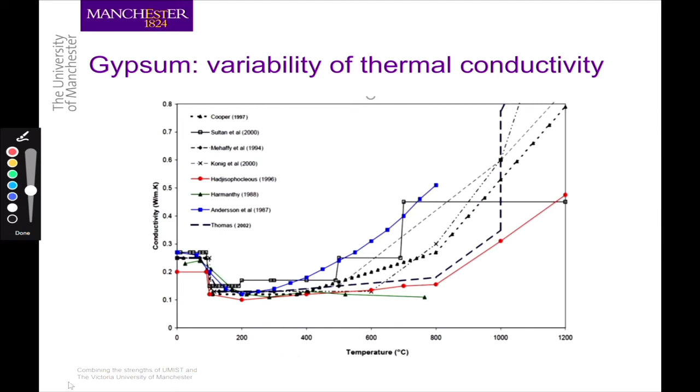How do we deal with this uncertainty? Which one is actually the best one, the most accurate one? But if we can't solve that problem, how do we deal with this uncertainty? That, of course, is an issue as well. That depends on the structure you're dealing with. So there are still a lot of issues here.

So, as a summary, thermal properties, I would argue, are the most important quantities when we're doing calculations of fire resistance of structures. More important than accuracy of structural calculations. As structural engineers, we're familiar with structural calculations, we try to do our best to make things very accurate, but we struggle.

But any accuracy we're trying to achieve in structural calculations may be easily overwhelmed by even small mistakes which we make in calculating temperatures of our structures. And that comes from wrong or inaccurate input information on thermal properties of fire protection materials. Why are we in this situation? Because there is not enough reliable data.

This comes from, of course, the problem is really complicated. It's actually much more complicated than structural engineering, because of the complicated behavior of the materials. And also there has been really a lack of sustained research effort, because it hasn't really been as attractive or sexy as doing complicated structural engineering calculations. So how do we then move forward?

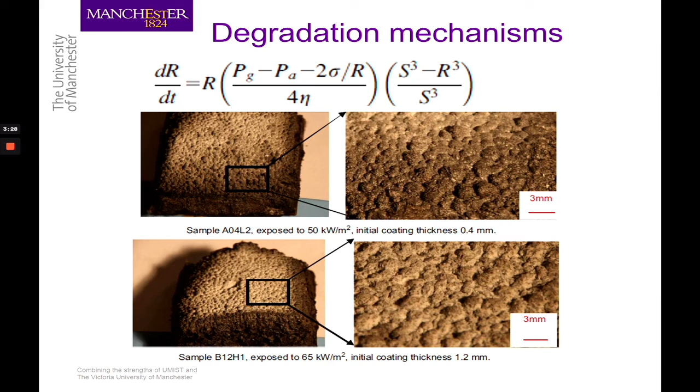Returning back to my food analogy, that is a bit like your nice, delicious plate of food exposed to high temperatures, water or dirt: at best it loses flavor, if it's worse it becomes sour and disgusting, and the worst it becomes poisonous or dangerous. So that's the degradation mechanism. It is a very complicated mechanism and is irreversible, which means once the intumescent coatings have degraded in the environment, we can't go back and improve them.

But yet we still have to do things. What do we do? Well, I put in here two aspects. One is about assessment of the residual life of intumescent coatings. The other one is, having done the assessment, how do we reinstate our structure to achieve the desired fire resistance periods. So looking at assessment, these methods have not, as far as I know, been systematically researched. I've listed three things in here which could be done.

One is to conduct on-site heating fire tests, which can be done, but it's a bit difficult to implement on site. More importantly, the results are difficult to interpret because it's very difficult or impossible to mimic the design or required heating condition on site. The second method could be using the method I mentioned in my main presentation, by prediction. We can take a small amount of intumescent coating from site and do some chemical analysis to obtain the fundamental properties for predicting its performance. This is worth doing, but hasn't been done before.

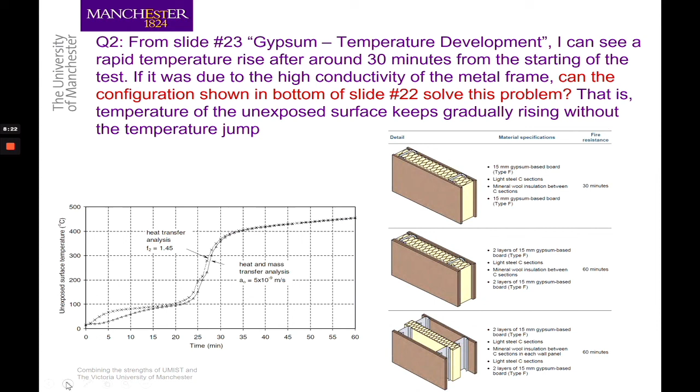The final question is about specification and application of intumescent coatings. About specification, we need to talk to the manufacturers. In the UK, you could find the information from the so-called Yellow Book produced by the Association of Specialist Fire Protection, or ASFP.

The ASFP, as an industry organization, has also done a lot of work on the application of intumescent coatings, because there is the risk of somebody not using the correct intumescent coatings and not applying them in the correct way. You could go to their website and find a lot of information about how to apply intumescent coatings correctly. And that is the end of my reply to the questions. Thank you.